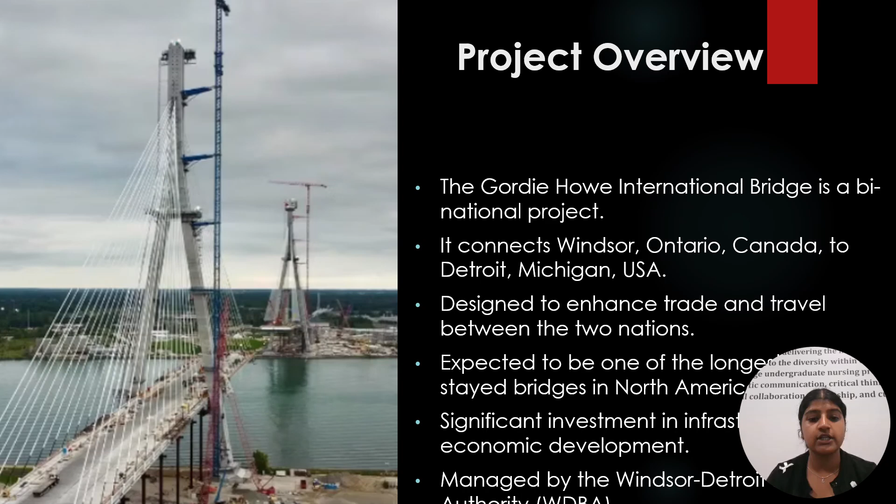The project is carried out by the Windsor-Detroit Bridge Authority. Its goal is to increase the effectiveness of cross-border operations.

Moving further to project scope, it measures 2.5 kilometers in length and has Canadian and US ports of entry on the international frontier. The project also entails the development of an interchange with the I-75 highway in Michigan. Furthermore, the bridge also includes walking and cycling facilities reserved for the people, making it a multi-purpose bridge.

Environmental tests were made to show how the project will improve the status of infrastructure and at the same time boost cross-border transportation and business.

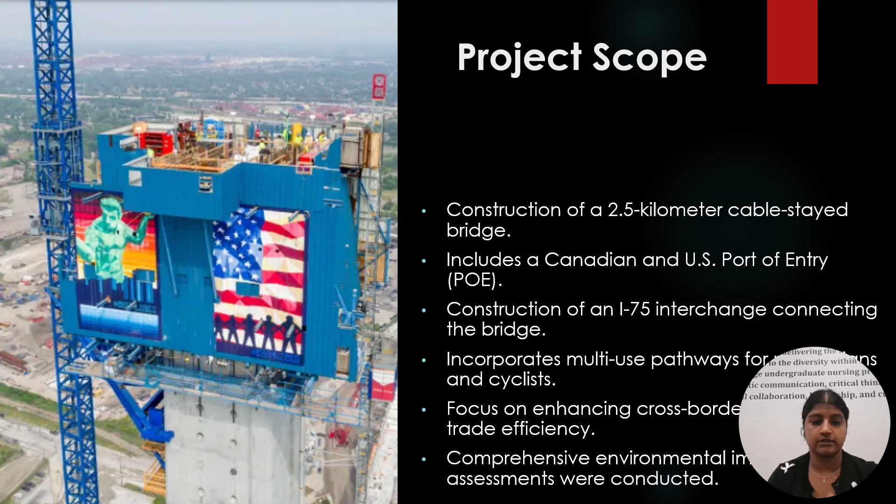Fourth slide is about project initiation and planning. Originally constructed as a public-private partnership, or P3 model project, the Gordie Howe Bridge project featured a clear project charter. This charter defined the objectives, project boundaries, and interested parties from the project initiation phase.

In sub-segments, Canadian and US rules and regulations on the environmental impact of the venture were followed, since feasibility tests and environmental scans were done exhaustively. A good corporate governance structure was put into place, and the Windsor-Detroit Bridge Authority was formed. It was important for stakeholders to be on the same page during this phase of the process.

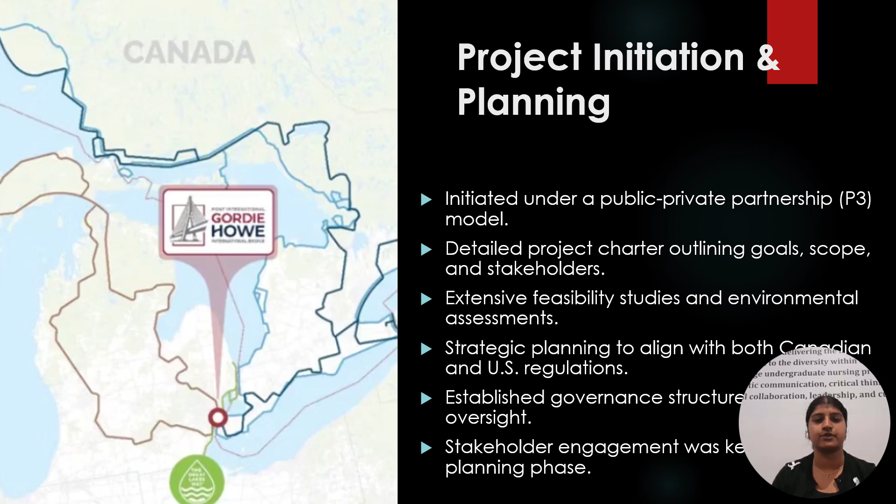Now, moving further, my other team member is going to discuss the next part.

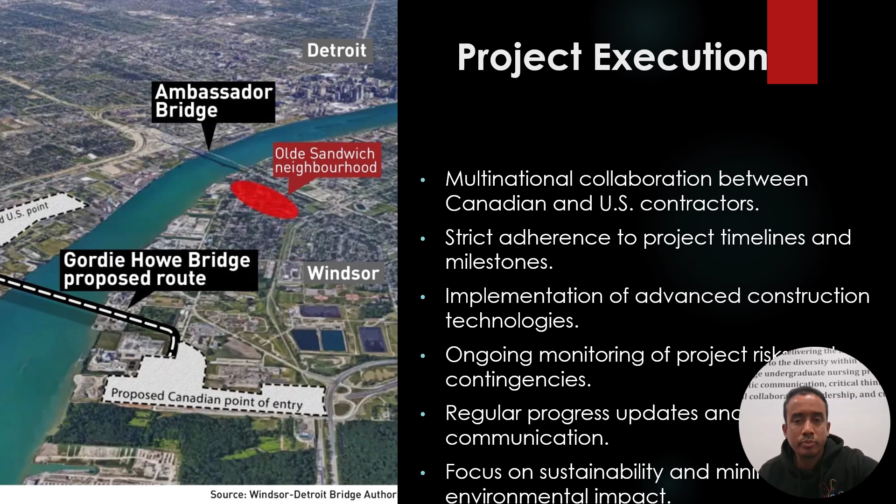Project slide 6, project monitoring and controlling. Monitoring and controlling were very critical because they ensured that the project was on the right track, maintaining a strong focus on comparing actual performance against the baseline plan. Already in process was the identification and control of risks. This focus was on quality control, and assessment was done at critical stages in the construction.

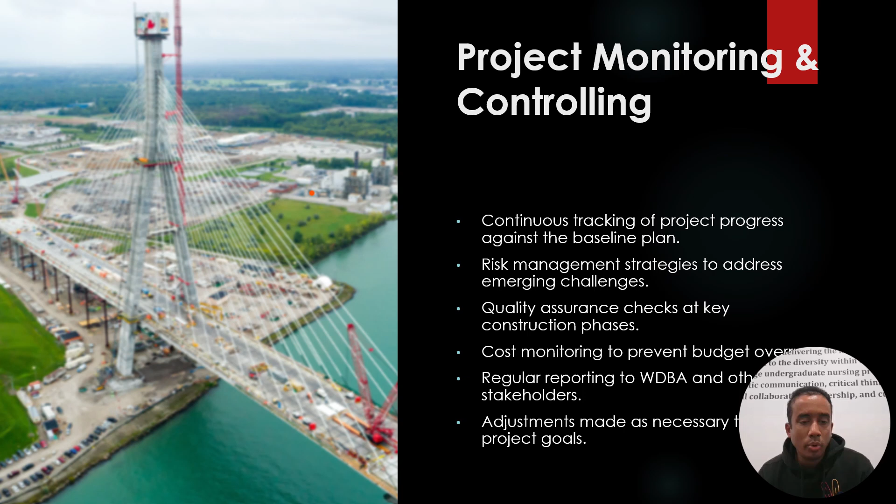Expense control was also crucial to prevent an excess of budget, and the reporting made things open to WDBA and other interested parties. If the project was staying off course, the necessary tweaks were made to bring it back on track.

Slide 7, key project components. When it comes to the construction of the Gordie Howe Bridge, the following part is extensive.

The built bridge has 6 lanes with an overall length of about 1.5 miles. Its main cable span measures 0.53 miles, making it the longest in North America.

This station ranks as a U.S. port of entry and spans a ground area of about 68 hectares, and involves the inspection of commercial and passenger vehicles. In Michigan, new road bridges include 4 new road bridges, while pedestrian bridges include 5 new pedestrian bridges, and traffic intersections were widened to accommodate the increased traffic.

Considerably improved interconnectivity resulted from the rearrangement of the improved I-75 interchange, specifically for the purpose of improving trade.

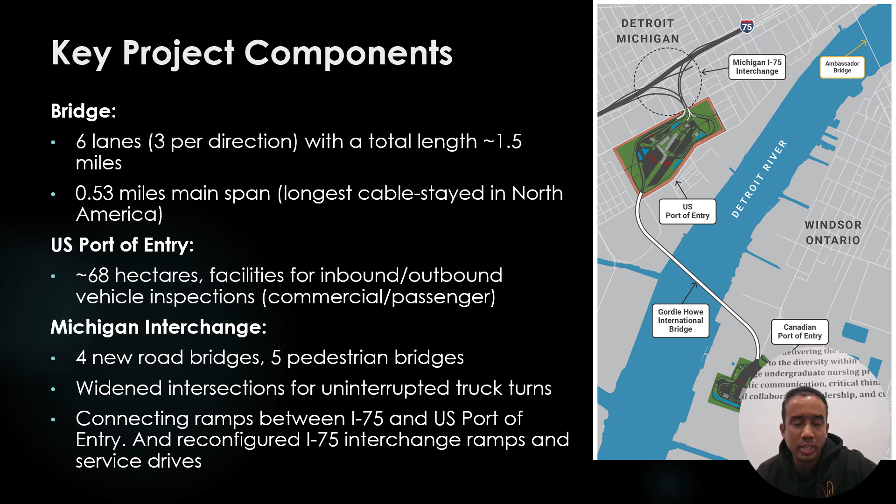This next slide is about key stakeholders. Significant stakeholders were involved in this project.

However, they were critical. The principal responsible for the sponsorship of this project was the Windsor-Detroit Bridge Authority, while the Canadian and American federal governments fulfilled the role of regulator. Windsor and Detroit local governments were also interested stakeholders since it affected the people in the two cities.

Constructors and operators and other partners were involved in construction, suppliers were involved in both construction and operation, and the local community's interests were involved; however, communities were consulted to avoid affecting them greatly.

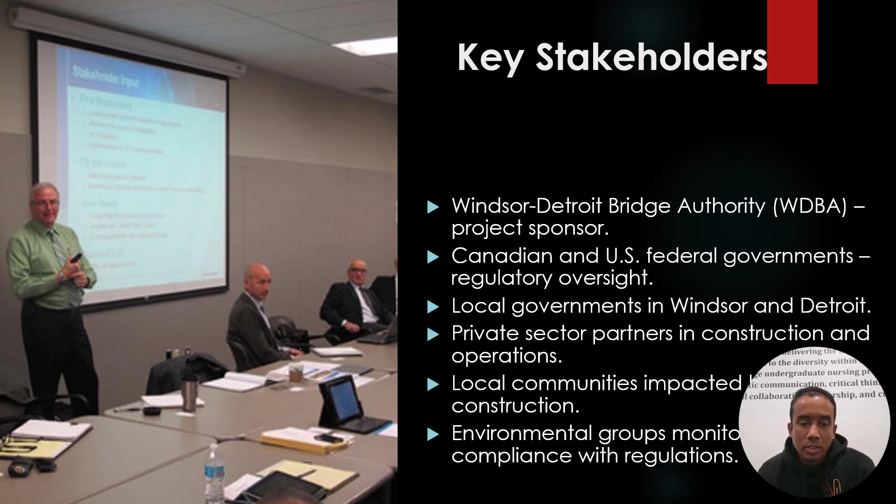The environmental groups ensured that the specifications of the framework complied with the stipulated legal regulations for sustainability.

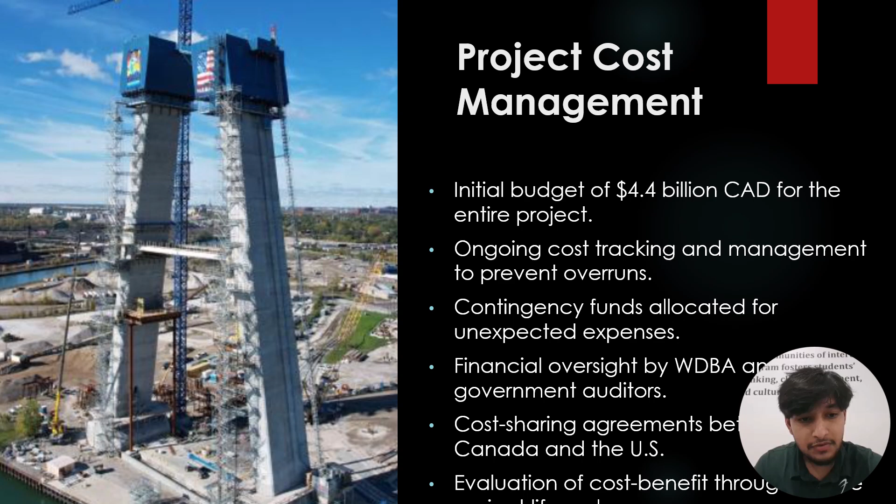Let's talk about project cost management. The project was estimated to cost around 4.4 billion Canadian dollars at the start. This was a big expenditure on both parts. Actual expenses were carefully monitored and controlled to prevent costs from exceeding the budgeted amounts, with contingency provided to cover other incidental expenses. Canadian officials made sure project finances were also controlled by the Windsor Detroit Bridge Authority and government auditors. Much of the cost for this project was divided between Canada and United States as cost-sharing arrangements, while conventional cost-benefit analysis was conducted concurrently with the evaluation of cost-sharing arrangements to improve the life cycle.

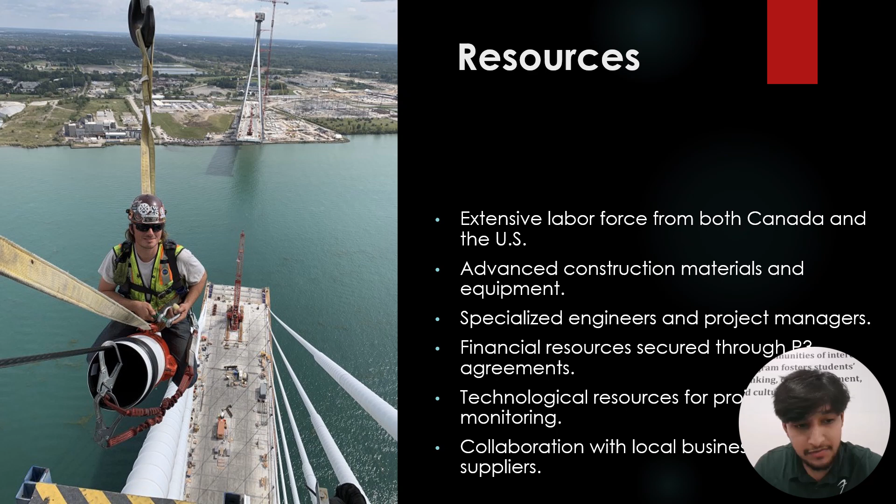Let's move on to the next slide. Resources. There were many resources used in this project. There was significant labor input from both Canada and United States, but specialized engineers and project managers manned the project. The construction was done using modern techniques and materials. Engineering and construction equipment were employed. Funds were raised with the help of public and private sectors, and tracking tools and technologies were used. This also included sourcing and purchasing from local businesses and suppliers, which benefited both the local economy and the needs of the project.

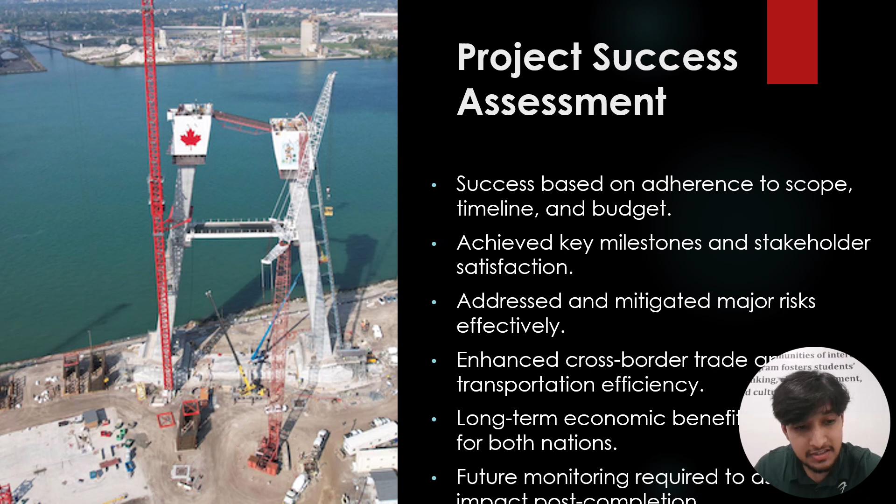Let's talk about the next slide, which is project success assessment. According to project management success factors, the Gordie Howe International Bridge project will be evaluated in terms of project scope, time, and cost. Major milestones were accomplished, and its stakeholders seem to have been satisfied up to this point. Most of the critical risk perceptions were identified and controlled efficiently. Subsequently, the bridge is expected to have a long-term positive impact by improving the reach and efficiency of transport across the border. Nevertheless, further evaluations will be necessary to define the broader consequences, primarily the economic changes that the authors assume based on the presented data.

In conclusion, the Gordie Howe International Bridge project stands as a landmark achievement in modern infrastructure and international collaboration. It exemplifies how strategic planning, robust stakeholder engagement, and innovative engineering can converge to deliver a transformative public asset. From its inception as a public-private partnership to its meticulous execution and monitoring, the project has demonstrated a commitment to excellence in project management principles, balancing scope, schedule and budget while navigating complex regulatory environments across two nations.

Beyond its physical structure, the bridge symbolizes a deeper connection between Canada and United States. It's not merely a conduit for vehicles and pedestrians, it is a catalyst for economic growth, regional development, and cultural exchange. The inclusion of pedestrian and cycling pathways reflects a forward-thinking approach to accessibility and sustainability, while integration with major transport arteries like I-75 enhances logistical efficiencies and trade competitiveness.

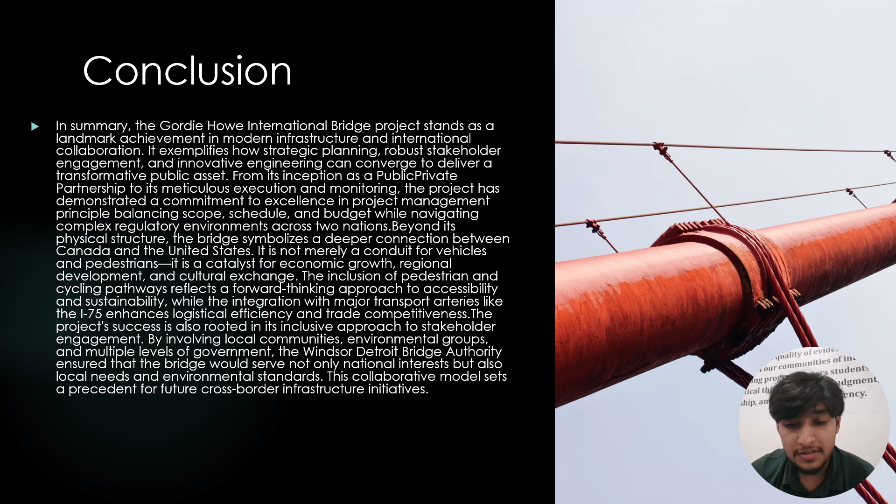The project's success is also rooted in its inclusive approach to stakeholder engagement by involving local communities, environmental groups, and multiple levels of government. The Windsor-Detroit Bridge Authority ensured that the bridge would serve not only national interests but also local needs and environmental standards. This collaborative model sets a precedent for future cross-border infrastructure initiatives.

So in the end, I'll talk about how the project's cost management strategies and shared funding responsibilities underscore the importance of transparency and fiscal discipline in large-scale developments. The use of advanced construction technologies and local sourcing further amplified its economic ripple effects, supporting jobs and business on both sides of the border.

Looking ahead, the Gordie Howe International Bridge is poised to deliver enduring benefits. It will streamline border operations, reduce congestion, and foster increased tourism and trade. Its long-term impact will be measured not just in traffic volumes or customs efficiency, but in the prosperity it brings to the surrounding regions and the strengthened ties it fosters between two neighboring nations.

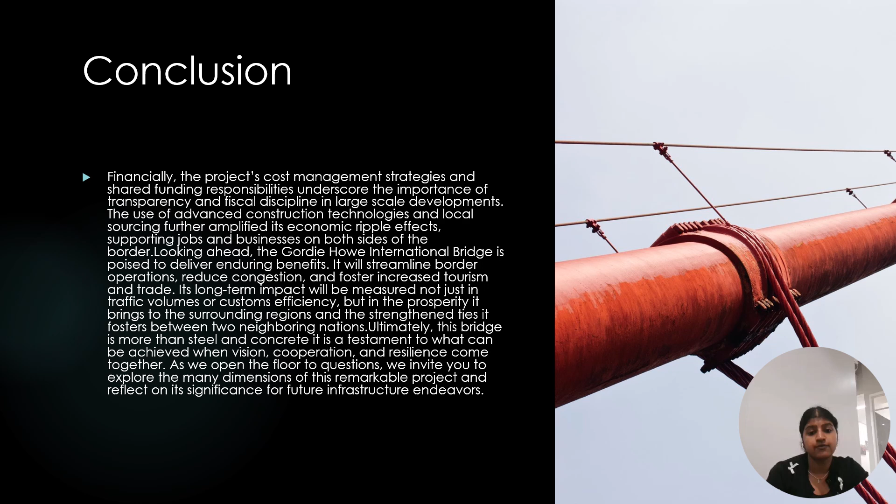Ultimately, this bridge is more than steel and concrete. It is a testament to what can be achieved when vision, cooperation, and resilience come together. As we open the floor to questions, we invite you to explore the many dimensions of this remarkable project and reflect on its significance for future infrastructure endeavors.